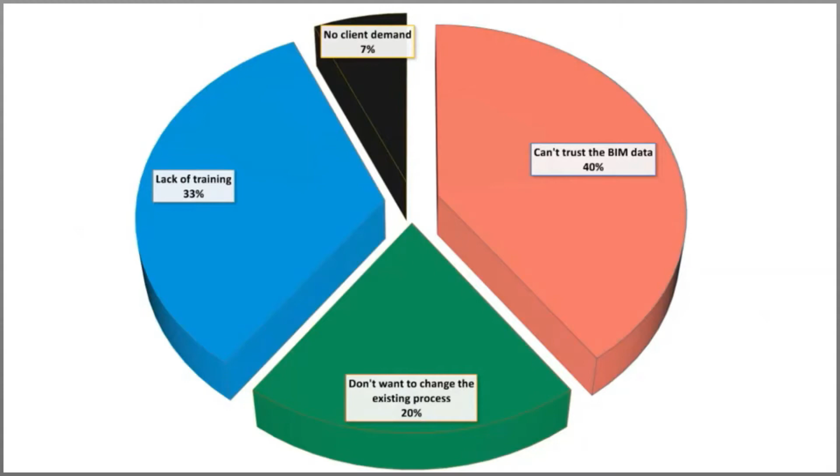The other thing that you mentioned as a big problem is the lack of knowledge. So we as a company make sure that even when we provide trials to our customers, we also provide bespoke training sessions so that our customers are making the most of their trials or their subscription. And not willing to change the existing process is also very common.

And we understand that having an established process in your company is something that is difficult to change. However, some of the processes are time consuming, and if you change to a different approach or different technology, you might save up to 70% of your time for this particular process.

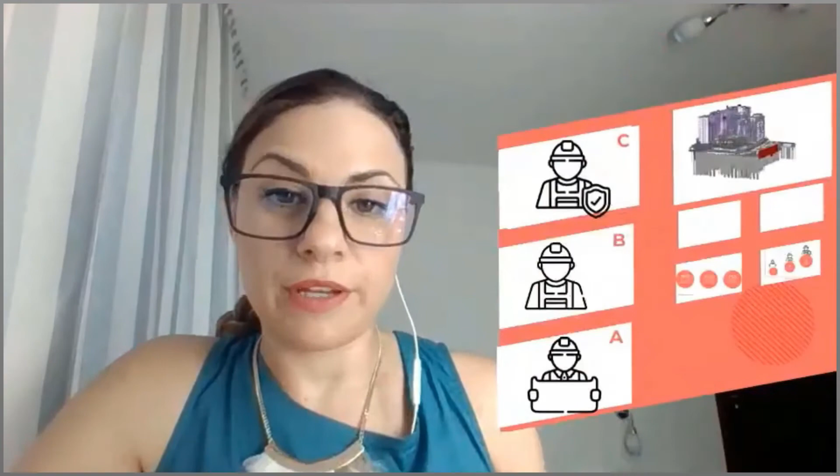So as I mentioned, I will give you 3 examples on 3 different approaches. And for that, I will use one of the biggest projects in the UK. So during phase 3 of this project, a number of contractors approached us as they wanted to improve their estimating process, and they wanted to estimate the project as quick as possible.

So this picture here actually is a good example of how we can merge multiple BIM models into the costing solution, so that can help customers to have better control on the project, and also to easily deal with the various changes within the project, and of course improving the information. And you can also see how these models are interfacing with each other.

So as I said, a number of contractors approached us during phase 3 of this project, and what was really fascinating to me was that each of them had a completely different approach to the tendering process. I'll call them contractor A, B, and C, as an example. So having different approaches, they actually spent completely different time on the estimating.

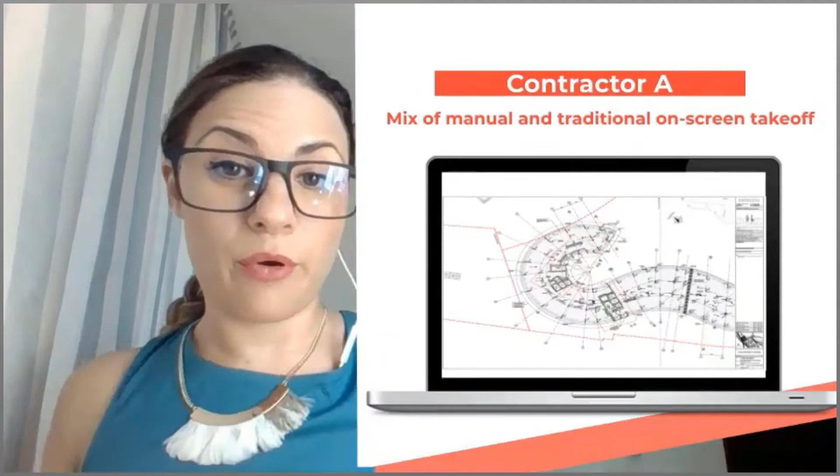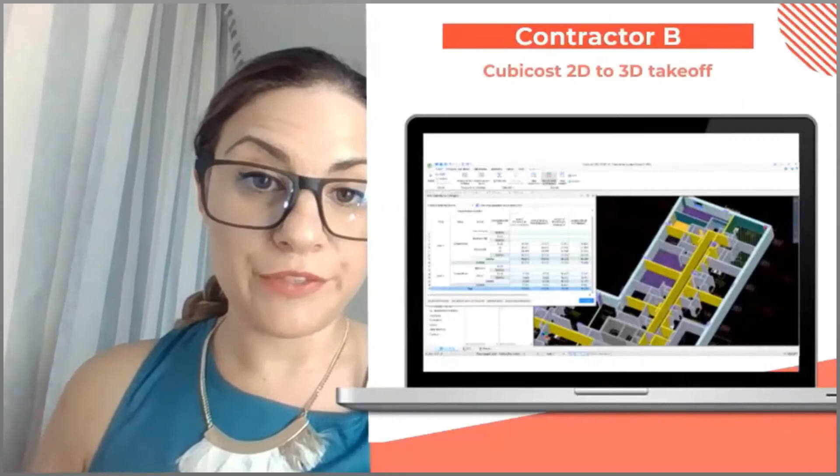So if we have a look at contractor B, which was our customer during this phase 3, they approached us as they wanted to improve their process, and they used the 2D to 3D approach. In this video, I will demonstrate briefly how that works and what we mean.

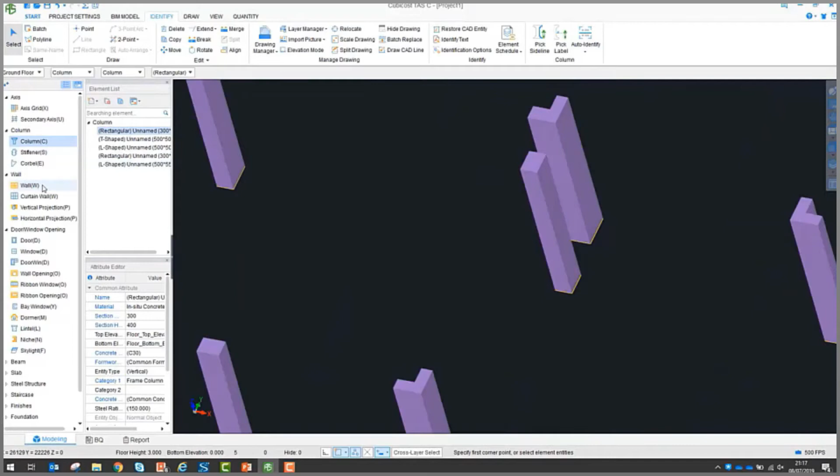So we imported the PDF files into the software, and as you can see, the PDFs were auto-colorized so that you can use these colors to identify the objects. You tell the software that this color represents a column, and the software is capable of auto-identifying all the columns in this PDF. We follow the same process for the walls and the doors.

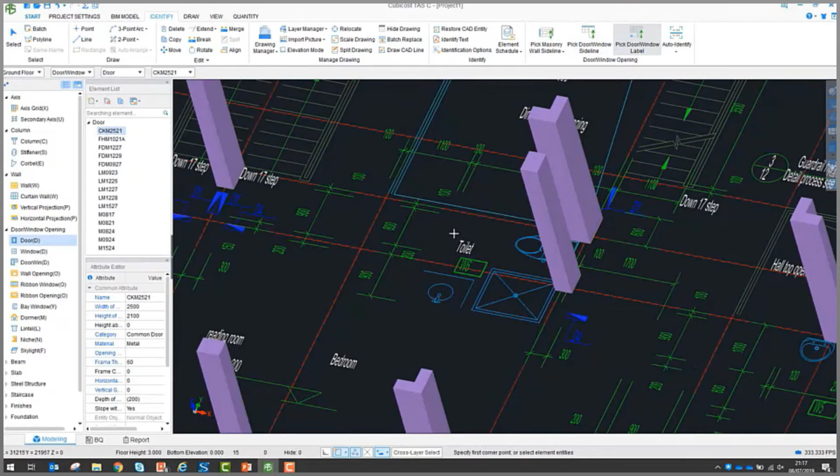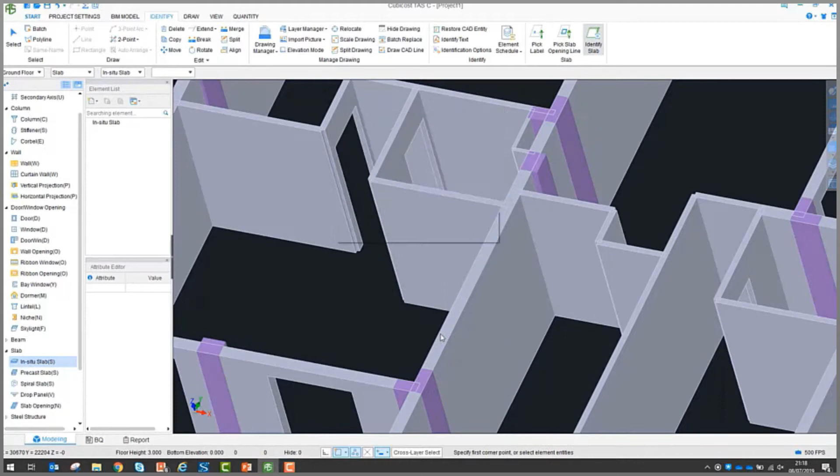What is very important to mention here is that we are not just drawing a line on top of the PDF. We actually create the physical 3D objects, and thus we are capable of generating an extra level of information such as volume of concrete, rebar, and formwork. We also use measurement rules for deduction and for generating reports for producing bills of quantities afterwards.

So as you can see, compared to contractor A, contractor B was way quicker because they saved a lot of time quantifying the items and generating the quantities from the PDFs.

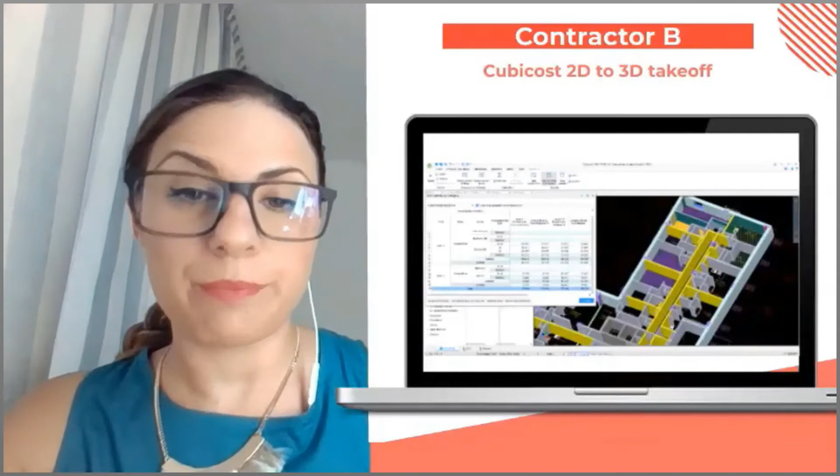If we have a look at the digital transformation within construction companies in the UK, it's evident that the industry is willing to change. A recent survey shows that 83% of construction companies have either completed a digital transformation project or have one underway, and 44% of them claim to have already completed their digital transformation.

We have to bear in mind that for each company, digital transformation can mean a completely different thing. For some it can be using a 3D viewer for a certain project, and for others it can be complete digitalization for each project and for the whole company. However, these numbers are a very good indicator that even though the construction industry has been slow to implement technologies, the industry is willing to change.

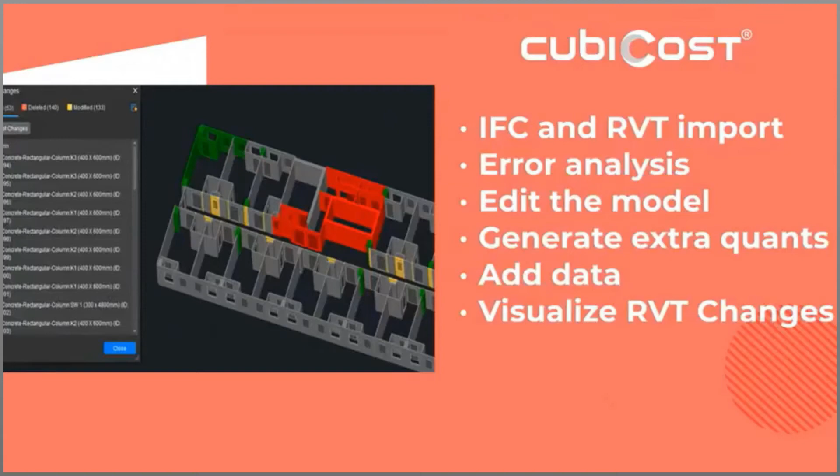So being capable to first identify the errors, then auto process them, edit the model, generate quantities, and also add data to the model is very powerful for this process. We believe, and we also know, that this helps to trust the model a lot and helps estimators to accelerate the process.

So moving forward to contractor C, who used the BIM approach. Contractor C had, alongside the PDF files, the BIM model. So they were way quicker compared to contractors A and B. In this video, you see how we imported the structural BIM model into the software.

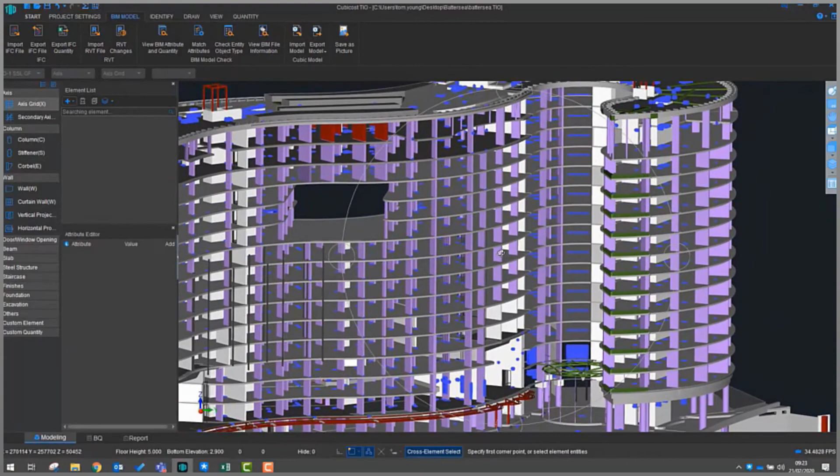And as it's a BIM model, most of the data was already contained. So they were able to generate the quantities basically with one click. However, as I mentioned, the model contained a lot of errors. So they run error analysis, and they could see what kind of errors they have, and they could decide if they want to process them or just leave them if they're not important enough.

So here we generate the quantities, as I said, with one click, and we use slab openings as an example here. So these are the original quantities. And if you try to remember the figures, for area we have 237 square meters, and for the girth we have 819.

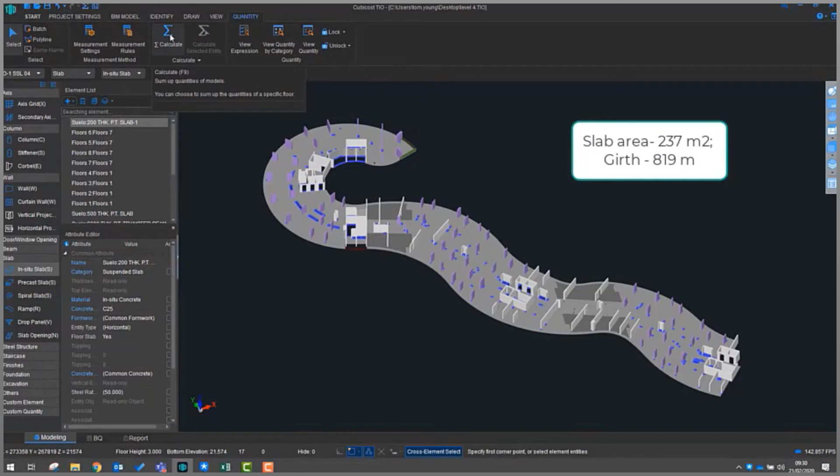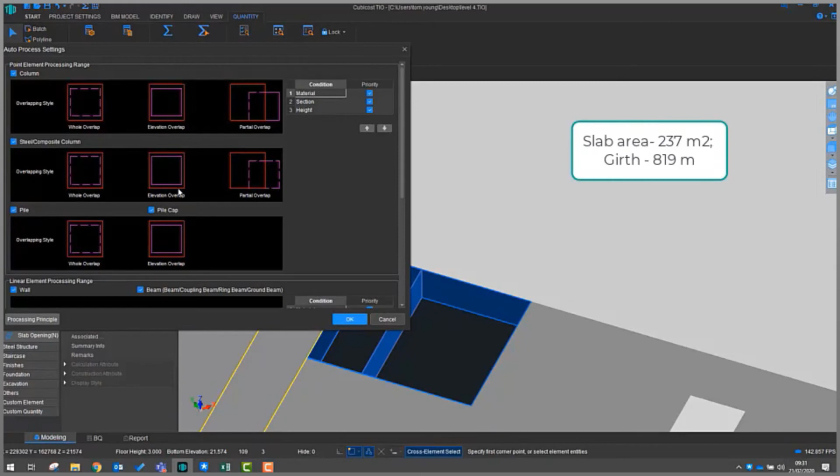And as we're giving example with slab openings, we can click on one of the openings and see what kind of error we have. So here we can see that we have opening within the openings. So we can manually adjust this error, this overlapping, or we can run the auto process as we are doing in the video.

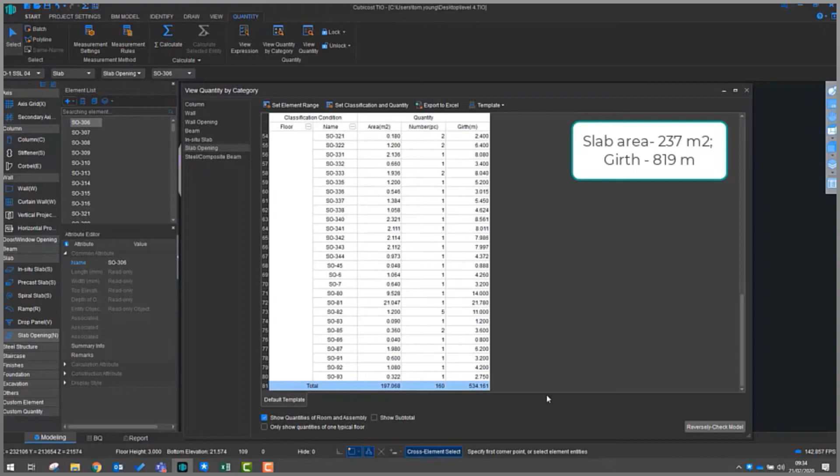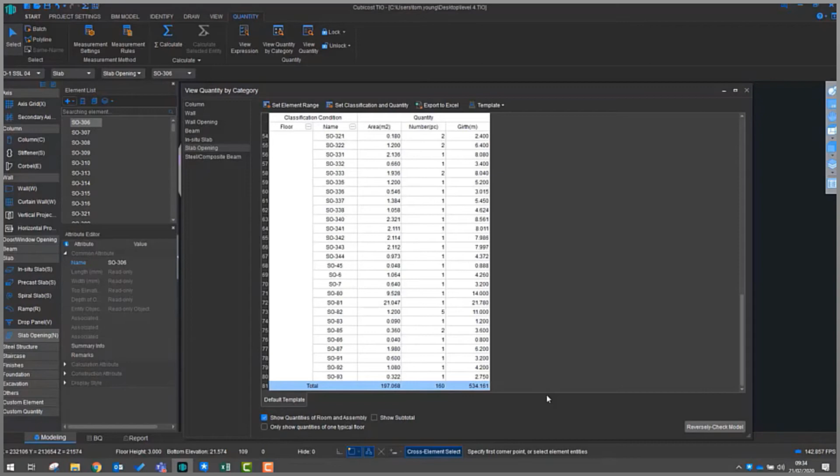Once we are done with the processing, we are generating the quantities again. And as you can see, the figures are different. So the figures were automatically adjusted once we did the auto processing job. So you see how easy it can be to adjust the model and to adjust the overlaps within your BIM model.

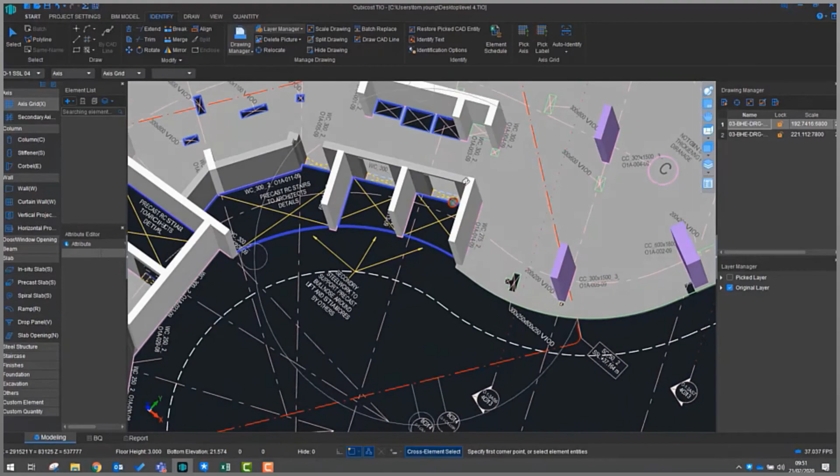There is one more feature that I would like to share with you, which is also helping to trace the BIM data. And this feature is overlaying the BIM model with the PDF file, as you can see in this video. So thus, you can make sure that the quantities you have and the building elements are the same and they're on the correct place, and there are no differences between the BIM model and the PDF files.

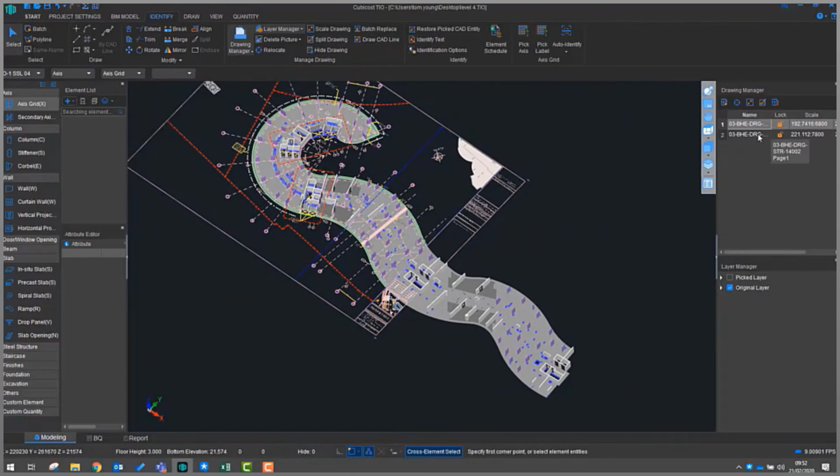This really helps our customers to improve and to increase the trust, so they can make sure the quantities they have are the same as a PDF file it is, and there are no differences. If there are differences, you're able to compare them and adjust if it's need to.

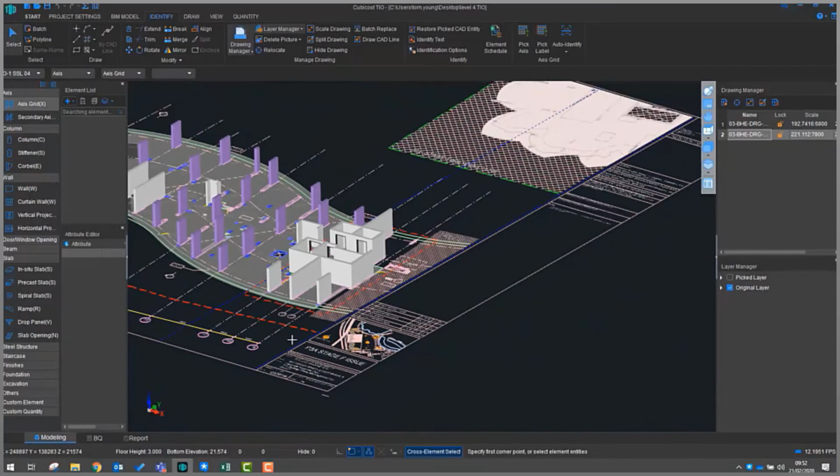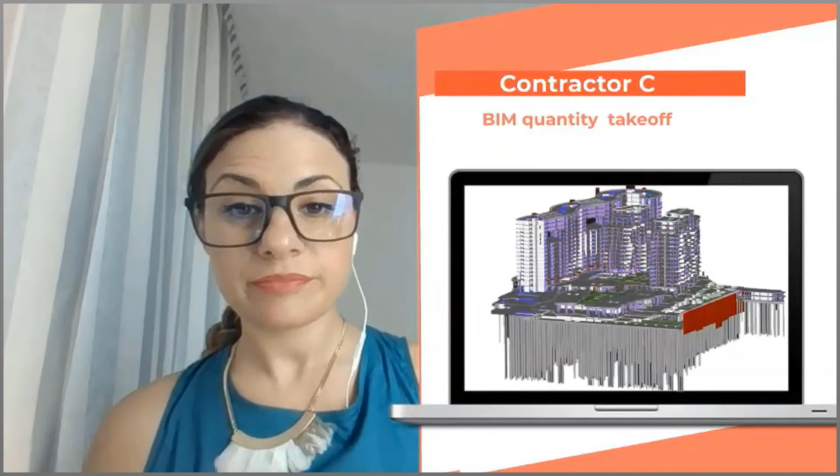So as you can see, by just having the BIM model, Contractor C was much more quicker, and they were the most efficient compared to Contractor A and B. So they spent the less time on quantifying the project, and as I said, they were the most efficient.

So if we have a look on the BIM implementation in the UK, we can see some very good numbers here. So a recent research shows that 96% of the construction companies plans to use BIM within 5 years, and 63% will need to use BIM on all projects within the next few years. Unfortunately, 15% only did that last year, and the numbers hasn't risen a lot. And we believe one of the reasons is the challenges that I mentioned today.

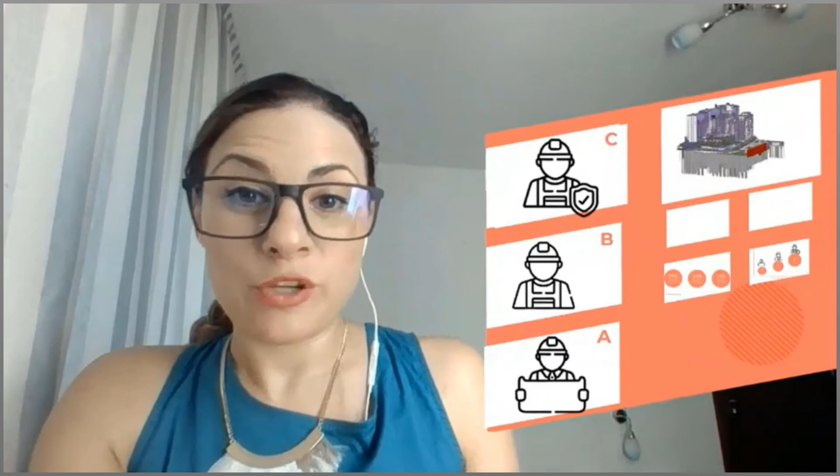So I believe having that kind of software can help you to trace the data and can help you through this digitalization journey. So we're going towards the end of this webinar. Before I finish, I would like you to think, based on the three examples that I gave today, which contractor is your company and what kind of process you have.

Are you contractor A, using mixture of manual and on-screen quantity takeoffs? Are you contractor B, who is having a software solution for 2D to 3D quantity takeoffs? Or are you contractor C, who is actively using BIM models within the cost teams and actively using the BIM data?